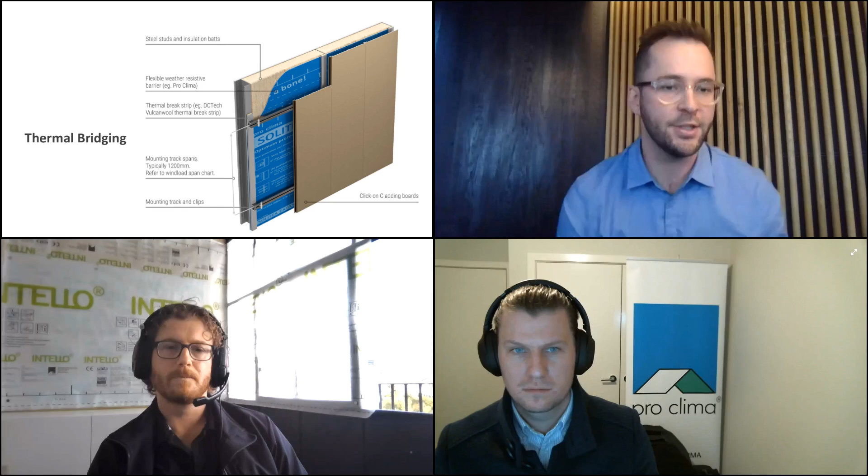And then the third consideration is thermal bridging. Now, I think thermal bridging is probably the forgotten child when it comes to the three. I can't comment for builders, but I imagine a lot of that has to do with value management and the fact that thermal bridging is a small component of the build out that makes a really big difference, but it's really easy to value manage off a project because it's not seen and the effects of it aren't really appreciated unless you're the end user.

And I think it's important from a design and specification standpoint that you appreciate the role that thermal bridging plays, and that you're considering it from the earliest stages of conceptualization, and educating the parties you're working with so that everyone understands the role it plays and that it's an important, critical component of the facade build out.

All right, now I want to get on to the exciting stuff. So we've outlined some of the common challenges, and now I really want to talk about why we're really here today. It's time to release our new Click-on Cladding range.

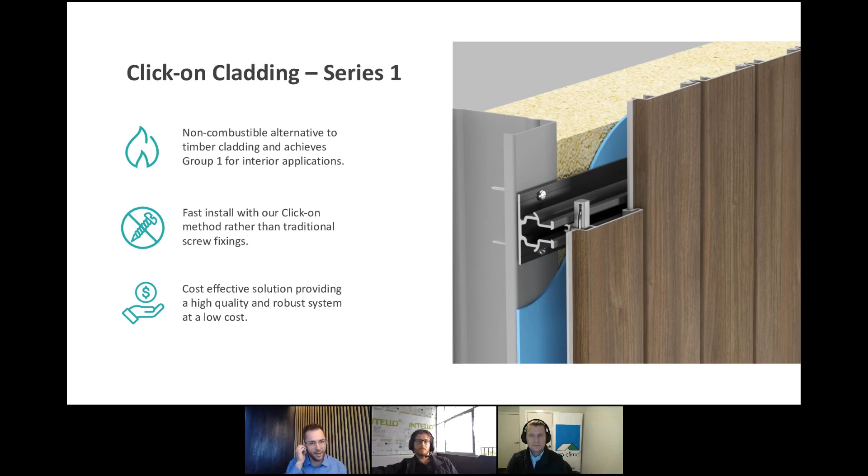And then this is just an example of the componentry behind the product. So that's our mounting track. It's a Group 1 product, and it's in a river gum wood finish.

So now I'll just play a real quick video. This one will go for about 4 minutes, and it's just exploring some of the componentry that makes up our Click-on Cladding.

Hey guys, you might get a welcome pop-up asking for sound permission. Just make sure that you hit yes.

So this is a really good example of a rainscreen facade, and we've designed this product from the ground up. We really wanted to give architects a flexible modular cladding solution so that they can design a facade that's unique to their project, but it's super easy to detail, super easy to specify, highly durable, and meets all of the regulatory standards.

Our Click-on Cladding product consists of an aluminium extrusion at the front, and then it utilizes a clip-on fixing system rather than each board being individually screw fixed. So what this means for your project is that it's designed to be super easy to install, super quick to install, reducing time on site.

In this video, we're going to explore the componentry that makes up our Click-on Cladding product. At the core of our product is our standard mounting track system, which utilizes the same clip that the industry has come to know and love.

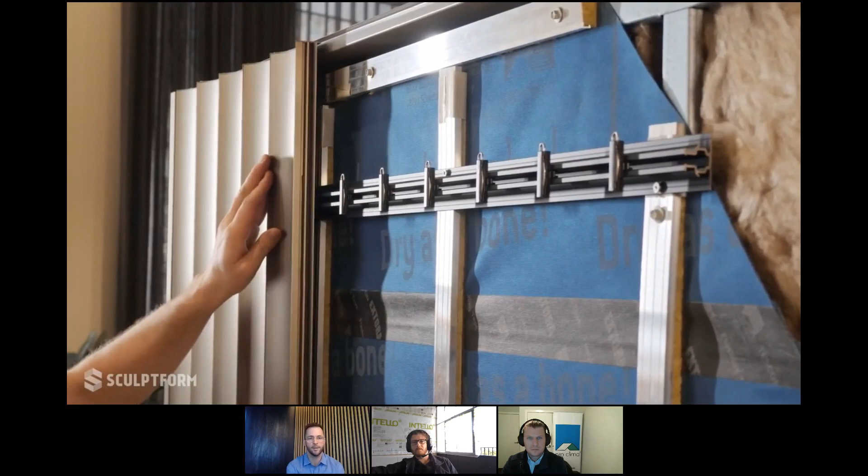The really cool thing about these clips is they come factory fitted to suit the unique project requirements or the spacings of the profiles that you've chosen. So what that really means is that the majority of the labor intensive installation and set out process has already been completed prior to the materials arriving to site.

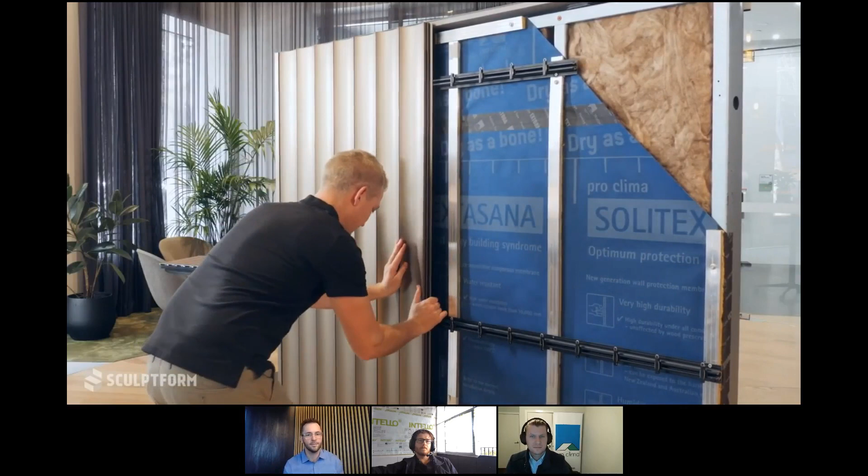And as we all know, in Australia especially in this day and age, the number one cost on a construction site is labor. So the more that you can reduce the labor cost, the lower your project cost is going to be overall. That's where these clips coming factory fitted really comes into play.

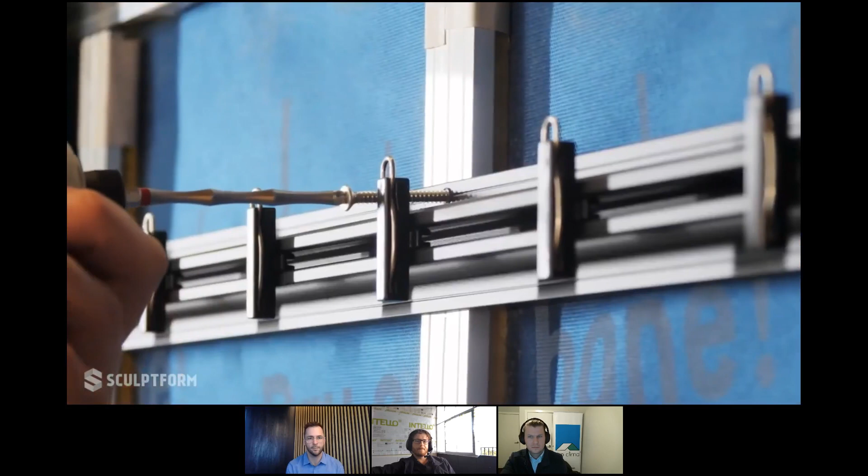So from an installation point of view, the installer will get these tracks with the clips already factory fitted in place. They just need to fix these at various centers, depending on the wind load that the project is exposed to. And from there, they just need to make sure that all the clips line up perfectly straight and the cladding board just gets clipped on and clicks into place.

Another major benefit of this product and its modularity is these aluminium cladding boards. They're available in a variety of different profiles, different textures, different shapes. They can be in a myriad of different finishes, and then you can actually mix and match them. So while we've got 120mm flute on show here, we've got a variety of different other flute widths that you can mix and match. You could even throw in a block profile if you wanted. And what that means from a design point of view is you can mix and match during the design process and create a facade that's truly unique to your project.

The other major and core advantage is that this product has been designed from the ground up, and it's really been designed holistically. What that means is that it extends to more than just some boards and fixings that you'd traditionally be able to get on the marketplace right now.

It actually includes a full range of trims that have been designed to seamlessly integrate and synergize with the rest of your design philosophy, meaning your facade design can be fully encapsulated from all aspects of it. We've got a few examples of it on this prototype that I'd like to show you now.

In the corner here, we have a really great example of one of our many corner details. This is what we call the shadow gap corner profile, designed to mimic the shadow gaps you see between each of our fluted profiles. So as you cast your eyes across the facade reading the shadow gaps, it hits the corner - it's a block profile with a shadow gap. That design philosophy is mimicked and honored so your eyes cast over onto the next face of the facade.

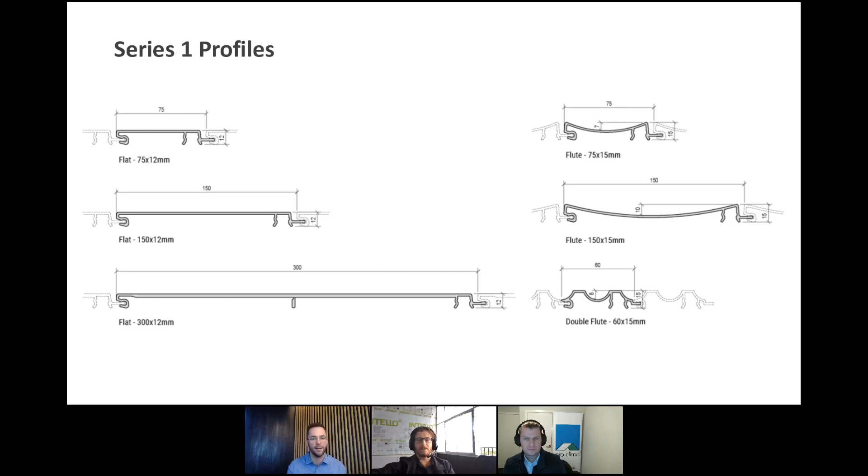I think at this point it's probably really critical that we highlight that our Click-on Cladding product is 100% designed to be a rain screen facade. Along with the roof, the facade is probably one of the most critical elements when it comes to protecting the building. It acts as the primary barrier against harsh weather elements such as rain, snow, frost, and temperature.

And while its primary function is fundamentally to protect the building, it also acts as the outer skin of the building. So it's the first thing a person's going to see when they look at a building, and often they'll have sentimental value attached to what the building looks like as well.

What we're really seeing, especially here in Australia, is that rain screens are becoming more and more popular, and they're an efficient way to protect a building, especially when it comes to meeting the increasingly stringent levels of regulatory oversight that we talked about earlier.

The reason rain screens are becoming popular is they're basically a form of double wall construction that utilize an outer layer - in this example, our cladding product - that really shields the build out and the building from rain, and there's a cavity that allows for drainage and evaporation.

And then behind that, there's an inner layer that provides a level of thermal insulation, and weather resistant barriers are in that inner layer as well.

So a typical rain screen is made up of the following componentry. There's generally cladding at the front, acting as the first line of defense. Then there'll be a vented airspace behind that, allowing for drainage and evaporation. Then there'll be some levels of insulation - perhaps something specified to deal with thermal, like a thermal break strip or a thermal barrier - and then some kind of weather resistant barrier as well, which is really where the Pro Clima team come into play.

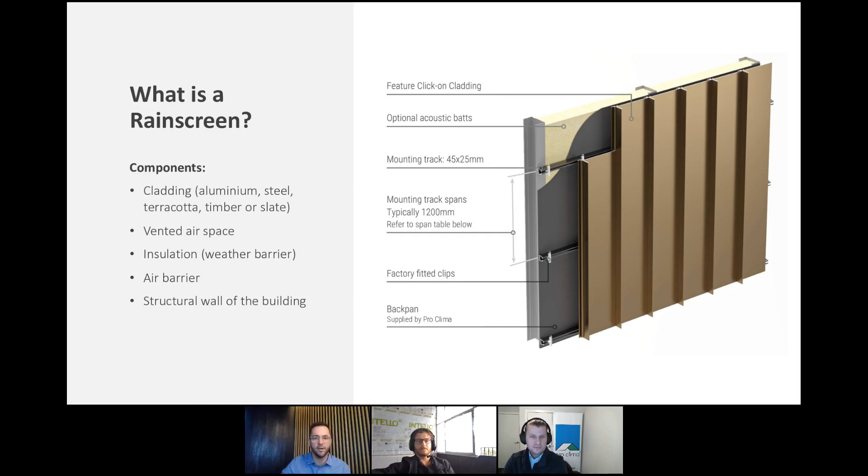And then finally, there's the structural wall of the building, which they're all kind of there to protect. So rain screens are an excellent solution from a practical standpoint, as they present excellent value while also being durable. They're energy efficient, low maintenance, and they help reduce condensation and humidity.

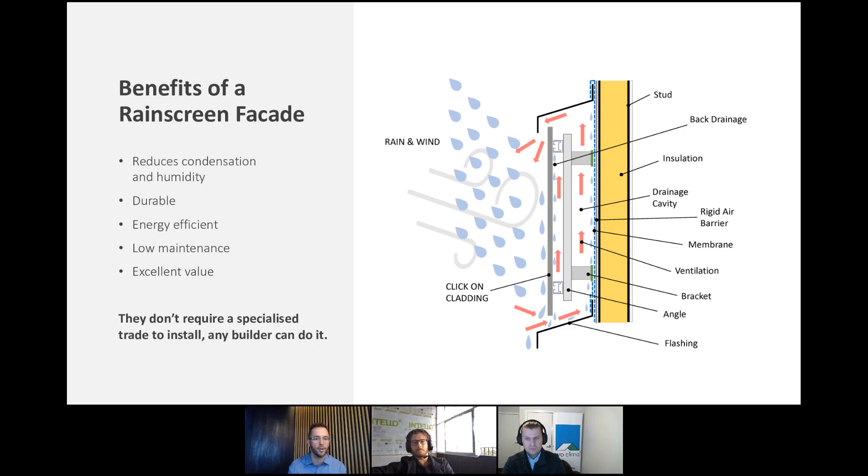However, probably the major benefit is actually in the double wall construction method. The bulk of the weatherproofing and the heavy lifting is done behind that outer layer, that outer skin, and that means it's away from the eyes of the public. So the focus now is no longer around design aesthetics for those components, but fundamentally comes down to pragmatic functionality, making sure what's behind that outer skin is 100% compliant and fit for purpose. That leaves architects and designers greater freedom in the expression or design intent they can follow with that outer skin.

All right, so this takes us to series 1 and the componentry, and on to Click-on Cladding series 2, and it's the reason we're really all here today, and we're super excited to release these profiles to the market. Just to recap, with series 1 we were pushed by architects to come up with a group 1 alternative to real timber shiplap style cladding. When we released that onto the market, there was a lot of response about, hey, this is super cool, but we want something with a bit more oomph or texture.

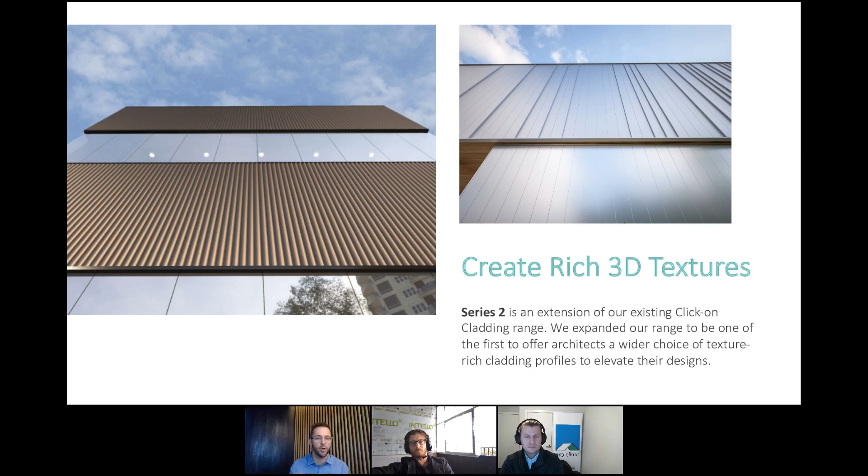At the same time, we were learning about some of the benefits of a solid aluminium extrusion, that it's rigid and holds its shape. That's where we've come up with the Series 2 profile range, which is all about creating rich 3D textures—profiles that have that oomph, that can add depth to the facade.

So the first one I want to release is our Edge series. There's a few products on the market quite similar to this—standing seam profiles, and there's kind of two options you can go down when it comes to standing seam. There's the zinc material standing seam, which, full disclosure, I think looks incredible. I've driven past a number of projects completed in zinc material and it looks great. Its drawback is that it's just super, super pricey.

And then on the other end of the scale, you've got roll form steel products, which are definitely a lot cheaper, more commercially viable, but generally don't have the structure or rigidity. So you often have to add some kind of rigid backing behind to give them support, and that generally comes at the consequence of fire compliance. The Edge series range is available in a variety of widths—120 mil, 180, and 300 wide. Again, modularity is at play, so you can mix and match those as well.

The next one I want to release is on the left-hand side, a 300 wide—we're calling it the Fine Line series. It's all about reducing that shadow gap that was in Series 1. Series 1 profiles typically had a 3 to 4 mil shadow gap between each of the boards. This Fine Line series is aimed at the more modern, sleek look, where it's just a really small hairline join that you see. 300 wide is basically pushing the boundaries of what you can achieve in an extrusion. But in essence, the Fine Line is about being able to cast your eye across the facade and really not read the joins.

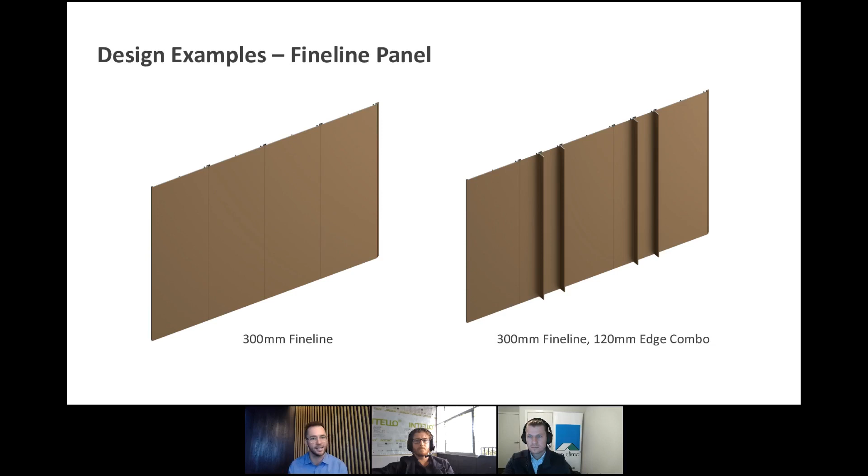The next one, I think, really answers a need within the community. This is our stepping block range, and it's available in 2 different orientations.

This is where we're really pulling on the strengths of the solid alley extrusion and creating the textured profiles. It's basically mimicking the design philosophy of a decorative batten look on your facade. A great example: let's say you were building a project and wanted a 50 mil click-on batten, the product we've had available on the market for a number of years, with a 50 mil gap, so equal batten and spacing across your facade.

Up until today, you would have had to traditionally design your facade, design the complete build out, put some kind of rainscreen skin in there, something like an FC sheet, and then come along with a decorative batten and connect it to the face of that rainscreen.

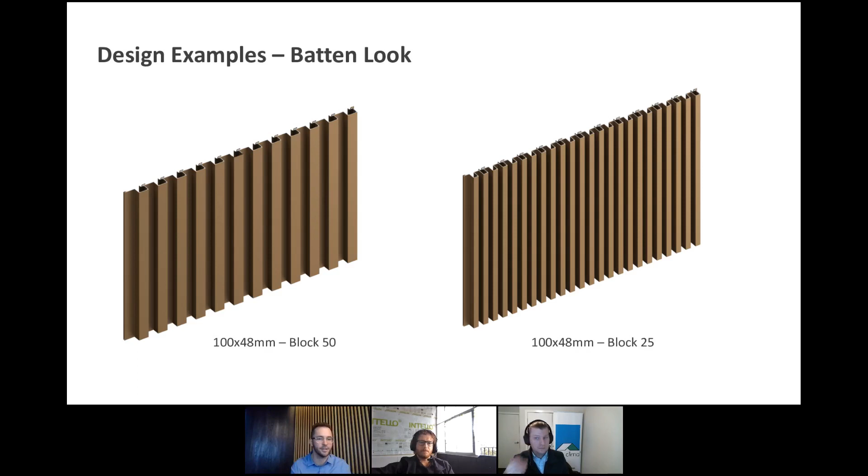This is just a recap of what we've got in Series 2 at the moment. This range will definitely be expanded over time. We can do quite a bit with those solid aluminum extrusions, but this is what we're releasing today.

On the left-hand side, we've got the 3 different widths of the Edge series: 120 mil wide, 180, and 300 wide. On the bottom right-hand side, we have the 300 mil Fine Line series, getting as wide as you possibly can so it looks really flat and you don't read too many joins.

In the middle, we've got the fluted range. There's 120 mil wide, that's the one you saw on the prototype video, and there's a 75 mil wide orientation as well.

You might be asking what's the biggest difference between Series 1 and Series 2 when it comes to the flutes. It's actually the depth of the scallop. This goes back to being pushed for a little bit more oomph, more depth, in the new profile range, so you can see the change in the profile. And then there's our 2 stepping block profiles.

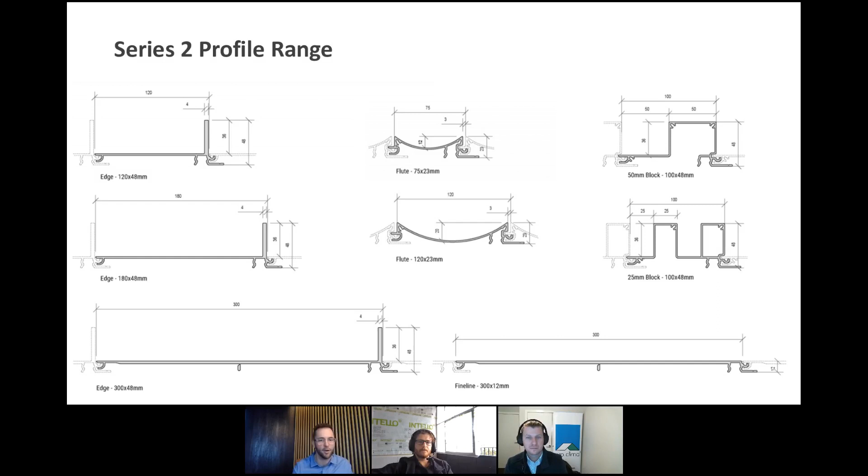It's important to note they're all designed to be proprietary systems, so they all come with their full range of trims designed to seamlessly integrate and follow the same design philosophy. Those are all available on our website.

I'll play a really quick video exploring one common type of build out, and then I'll throw over to the Pro Clima team, Stuart and Jesse, who'll talk a bit more about build out design and weathertight systems as well.

Today we're looking at our new Click-on Cladding product, which is designed to be a rainscreen. In this video specifically, we're going to explore the build out that goes into rainscreen design, and talk about why getting your build out right is hypercritical to ensuring long-term project success.

There are 3 items that we think architects and designers need to consider from the earlier stages of conceptualization to ensure long-term project success. The first is fire compliance, the second is leaky building syndrome, and the third is thermal bridging, also commonly referred to as the effects of thermal transfer. All 3 of these are critical issues faced on construction sites, not just here in Australia, but internationally as well.

This particular build out example is just one of many different build outs you could have on a construction site. But this one in particular has a 90mm stud cavity that acts as the frame, with insulation batts fitted between each of those cavities.

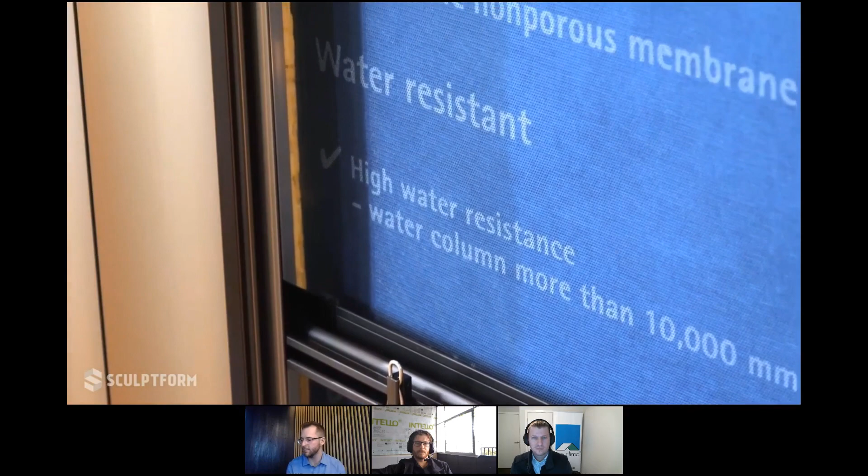What can happen is, if this isn't weather tight behind there, that water can permeate through to areas of the facade that aren't necessarily set up to handle that weather. When that happens, the effects can go undetected for a significantly long amount of time, and by the time you finally find out about them, it's already too late. It's catastrophic, not just aesthetically, but structurally as well.

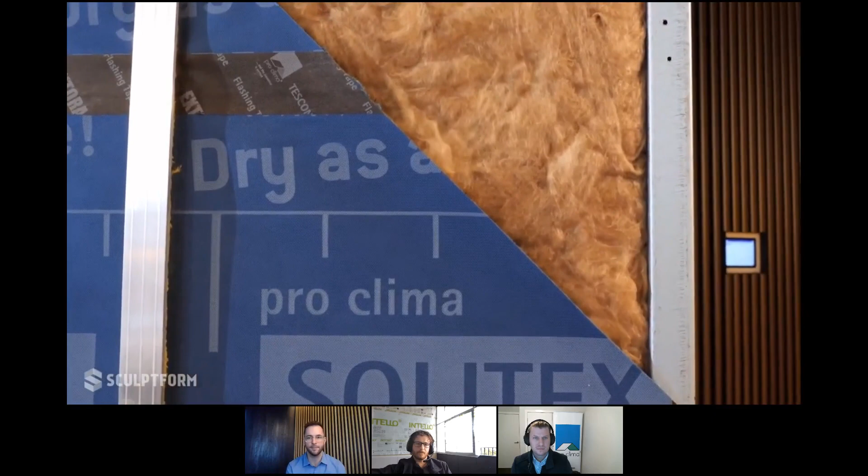So what we've done in this build out example is partnered with a company called Pro Clima. What you're seeing here, this blue material, is a weather resistive barrier. Any water or moisture that gets through, this flexible membrane acts as another layer of protection, ensuring that water doesn't penetrate through to the facade itself.

The third major consideration we want to talk about is the effects of thermal transfer. Thermal transfer refers to when the external temperature outside penetrates through the componentry of the build out and gets through to the other side of that facade.

Unfortunately, whether due to time or cost, the effects of thermal bridging often aren't considered. Here at Sculptform, we're all about best practice build out design. So in this prototype we've worked with a company called DC Tech, who provided us with these thermal break strips. They protect the metal stud cavity from the external temperature, delaying the thermal transfer or temperature permeating through the metal stud cavity and getting to the facade behind. Consequently, that's improving what you might have heard of before, the R value of the project.

Now, the requirements of each project are different. The type, size, and category of the building, the different levels of weather it's exposed to, and perhaps the standard of building you're trying to adhere to, all play an integral role in determining the build out you need to specify and the componentry you need to include.

Here at Sculptform, we're all about best practice design. While our product specifically is a rainscreen solution, just the face of the build out, there's a barrage of different stakeholders you need to bring together to design a build out. We've partnered with a few different organizations and made recommendations about what we consider best practice facade build out designs, and we've put those on our website, so we encourage you to check those out. If anyone has questions or would like to get in contact, please don't hesitate to reach out.

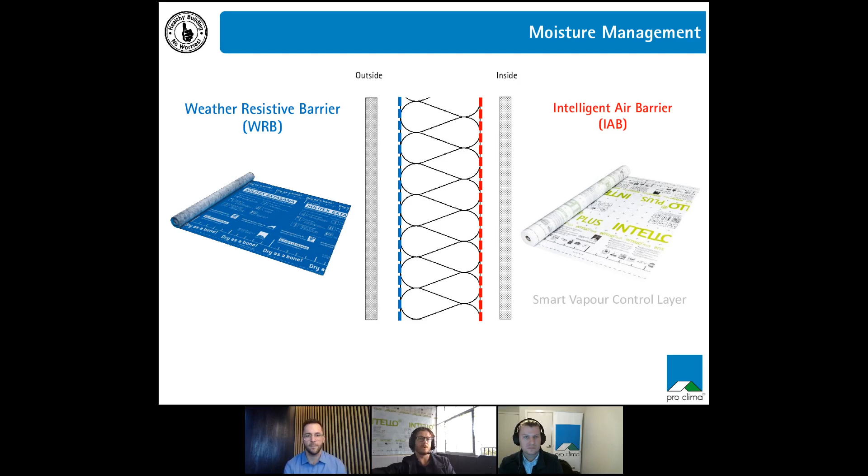So Sculptform has utilized the Solitex Extasana weather resistive barrier system. And I say system because it's not just the wrap itself, it's all the components that go with that. One of the fundamental things about making a rain screen work is to have good pressure equalization in the system. That means the weather resistive barrier system should be very wind tight. And the more wind tight it is, the more watertight it is.

And to get it wind tight, you need to use good quality sealing technology and adhesion technology. That's what pro clima offers in Australia, which is best in class in terms of the adhesion technology on our taping systems and our adhesion products. So this is about sealing the lap joints in the weather resistive barrier to get the best outcome.

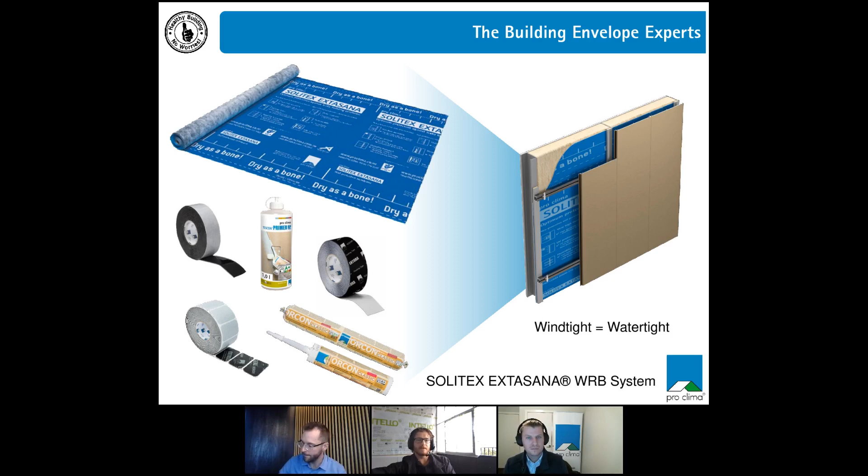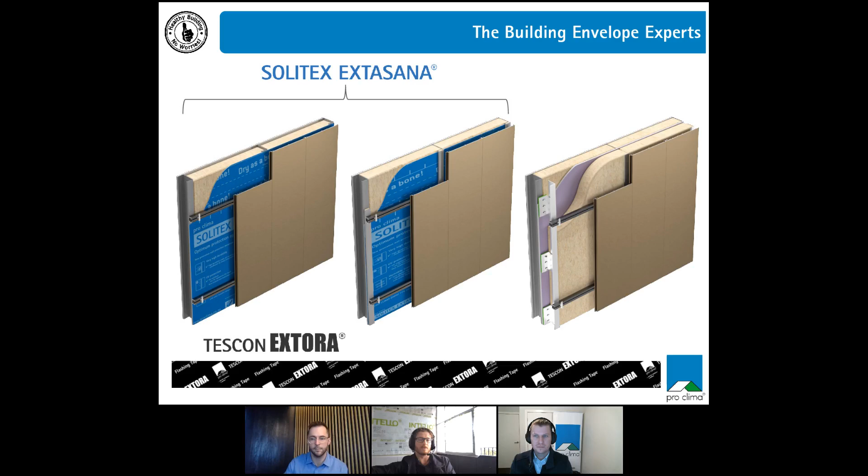That's where the taping technology used in the Tescon Extora is best in class and will provide those outcomes we're looking for. pro clima is basically, as far as I'm aware, leading the market in terms of the highest pressure rating achieved in a facade system for a flexible membrane. This is a test we've undertaken at a test lab for a cladding supplier, and we achieved up to or in excess of 2 kilopascal serviceability limit. In case you don't know what that means, that's a very good result in terms of wind pressure and maintaining water holdout at that 2 kilopascal limit for a flexible membrane system.

And this comes back down to detailing, and this is our in-house installation expert, master carpenter Daniel Jacobs, who is looking at and installing all those details necessary to achieve those outcomes.

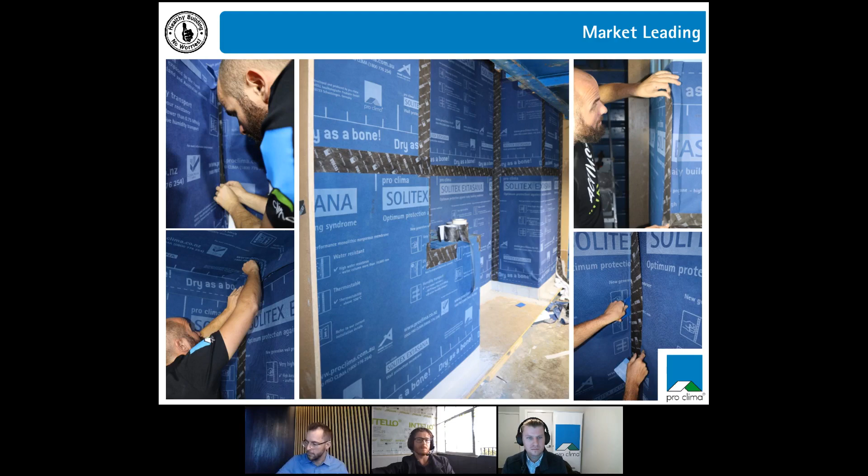So in terms of delivering watertight facades and watertight buildings, it comes down to having quality details in the design phase with good guidance, as well as quality products which are durable and will maintain water holdout for the life of the building, as well as quality workmanship. Quality workmanship can always be the main failing point in any facade system and lead to leaky buildings, which is what pro clima puts a lot of emphasis on.

So talking about quality products, pro clima utilizes a technology in our membranes known as TEEE, which is a thermoplastic elastomer ether ester. This is the functional film used in our membranes. It's protected on either side by polypropylene fleece, but the interlayer is essentially what does all the work, doing the heavy lifting in terms of water holdout, wind tightness, and air tightness to maintain its fit for purpose function in the building envelope.

So the TEEE technology, when you look at that on a micro scale, is what we call monolithic. It has no micropores in it, as opposed to other technologies on the market, which are called microporous membranes or microporous technology. The microporous technology is manufactured with pores in there to enable vapor permeability in those functional films.

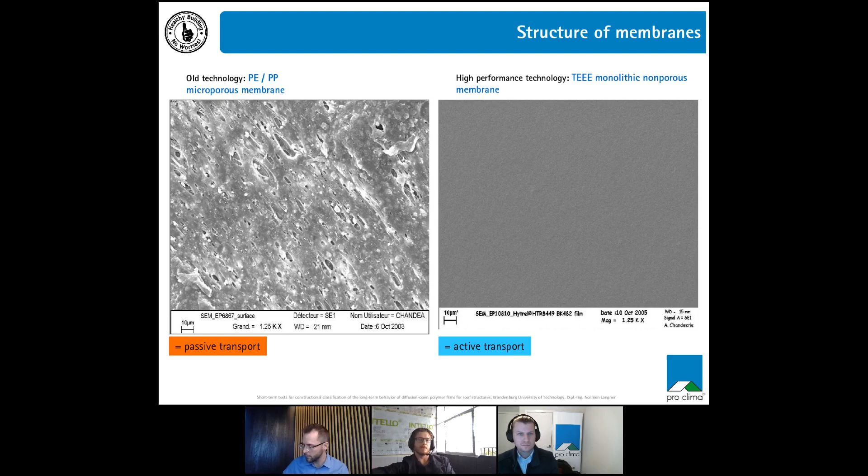The way water vapor transports through the different technologies is that in the microporous film, it happens through the pores in the film. In pro clima TEEE technology, the water vapor is actually transported through the chemical structure or the chemical lattice in the TEEE polymer.

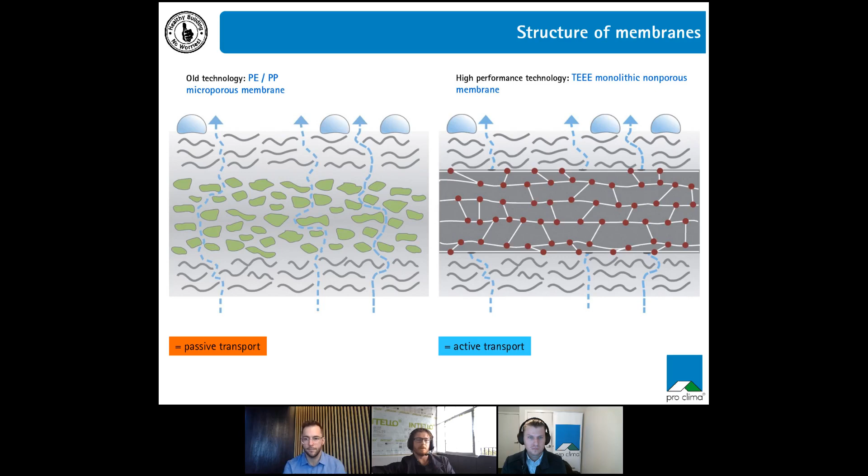Also, what this polymer technology does for us is it delivers excellent UV exposure and durability of our products. And that's what Pro Clima is all about, and that's what water moisture management and water vapor management is all about. It's about long-term durability of our structures.

So the polymer technology we use, engineered in Germany with highly intelligent chemists, enables us to achieve excellent ratings for UV exposure prior to cladding. For all our core product range for roofs and walls, the UV exposure is 180 days, so you can leave it out for 6 months before you even clad the building, and it can still maintain its water holdout and be fit for purpose.

Also, the technology used in the membranes enables us to achieve products that are suitable for these harsh Australian conditions which we're building in. 120 degrees continuous operating temperature for our Solitex Extasana membrane is best in class, and that means you can use it behind any color cladding, and in particular highly conductive claddings like aluminium, where the temperature is of no concern when you get direct sun onto that cladding.

So the long-term water holdout is also best in class in terms of the TEEE technology. We've done some testing in Germany on behind-roof claddings for 5 years with TEEE technology and microporous technology. What happens over time is potentially the microporous technology starts to become less of a water barrier, and after 5 years of aging, the pores will start to allow water to drip through those products, as opposed to a monolithic technology, which doesn't have those pores and won't eventually lead to water transfer.

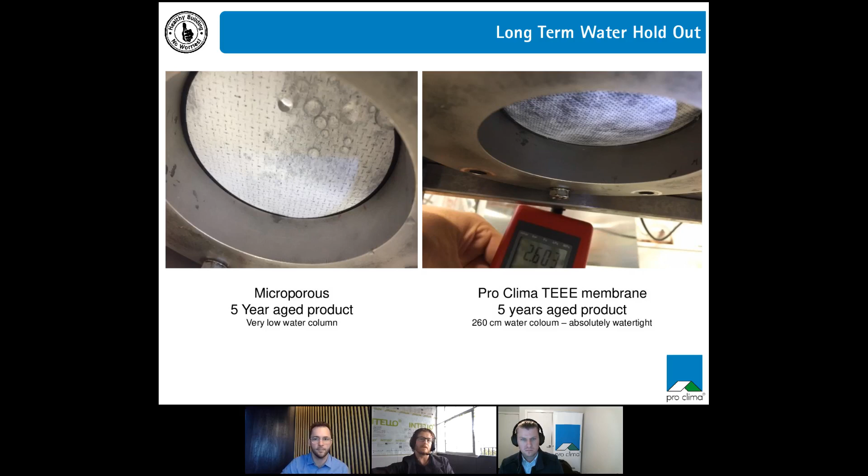And lastly, quality workmanship. ProClima is pretty big on this because we know that you can't just have good products, you need to have good workmanship. This is where the skills training comes in, and this is also why we put a lot of effort into our guidance documentation and application details.

So we have probably the most detailed application guides in the industry in terms of weather resistive barriers. This is to make sure the systems are weatherproof, particularly where you start interfacing into other cladding systems or dissimilar materials, and that's when you really need to have good workmanship and good detailing.

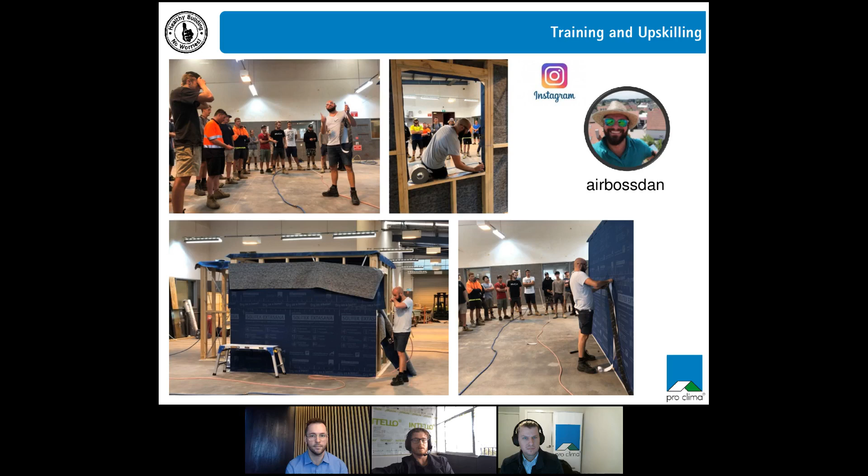And also we have Daniel Jacobs, who is our master carpenter and trainer, who's able to train on site and train the facade application installation teams to enable excellent outcomes and ensure that those systems are installed properly for long-term durability.

And that brings me to the conclusion of my presentation. Basically, ProClima is operating in Australia and New Zealand. We've been in New Zealand for a little bit longer and have a lot of expertise around what's happened in New Zealand in the leaky building crisis, and also solutions to that, utilising good quality weather-resistive barrier systems.

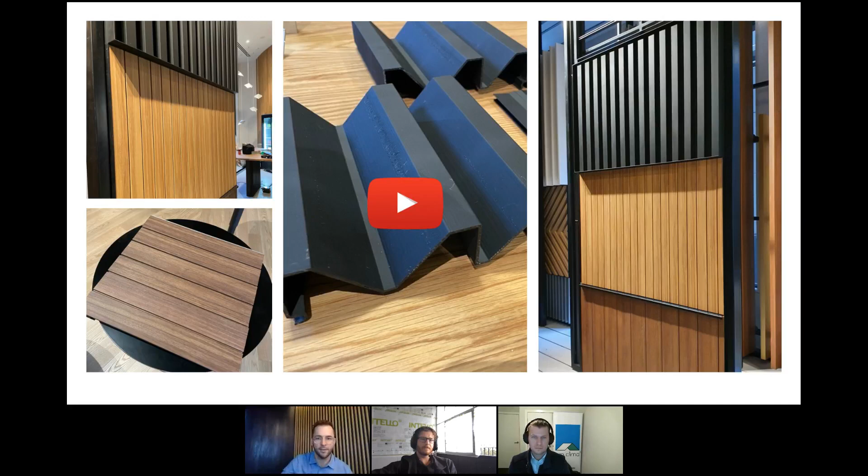For the CPD, there'll be a survey sent out after today's presentation. The questions are: what are the three things you need to consider when designing a facade build out? Things like fire compliance, thermal bridging, and leaky building syndrome are all super critical. Also, what are the benefits of utilizing a rain-screen facade? That's really that double wall construction method. And then, what's the major advantage of using a solid aluminium extrusion product?

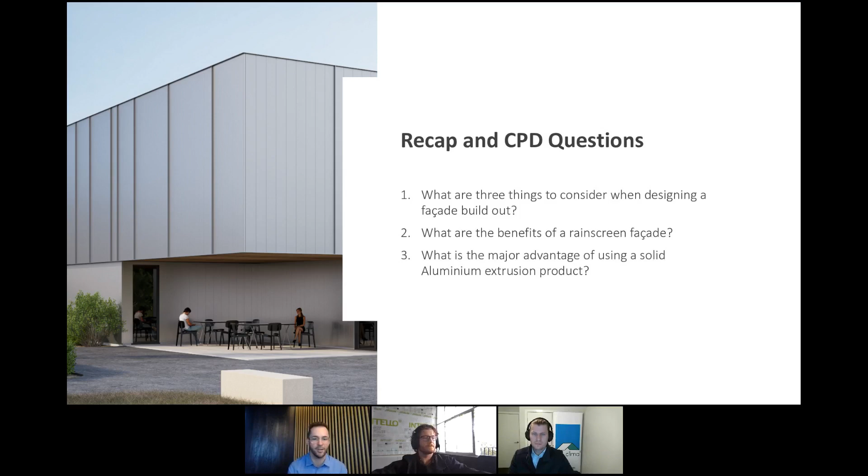I'll just answer some high level questions that have been asked a couple of times. In terms of availability, this product has been released to the market. It's available now, you can order it now. It's on our website, the trims are all on the website, the profiles are on the website. There's a pricing guide you can download from the website, or our support team should be able to help you out with pricing. I know a few people have mentioned they've had some challenges with pricing - I'll put my email address at the end of today's presentation, contact me directly and we'll get you that kind of stuff pretty quickly.

In terms of finishes that are available, there's a variety of different profiles. We can powder coat those any color from the Dulux or Interpon range. We can anodize them, and we can also wood finish a lot of the ranges. There's a couple we can't put a wood finish on, or we might only be able to put it on one face, but give us a call about that if that's something you're looking at exploring.

There was a question about flashings matching the product. Generally, you can powder coat or anodize a flashing to match. That would generally be in the scope of the actual install, or that's something we can work through. Wood finishing of the flashing may be a little bit cumbersome just because you have to fold up the material.